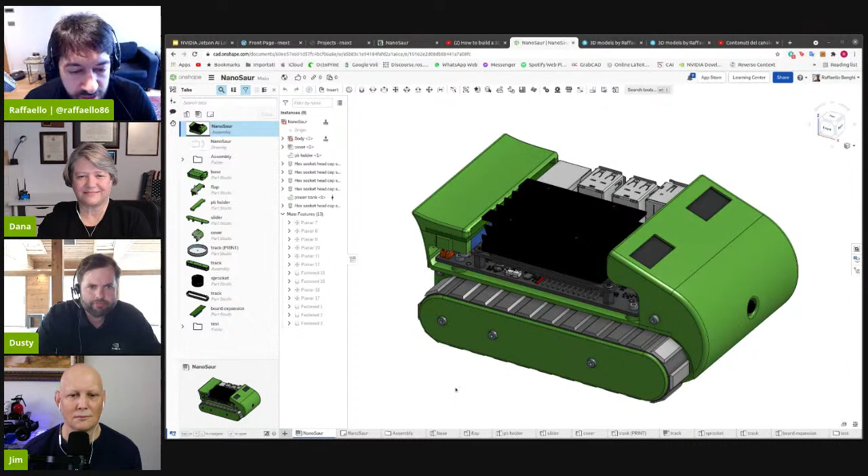It's completely open source, you can make or modify some parts. For example, in my community for Nanosaur, there are some friends that are making a Nanosaur in wood. It's really nice.

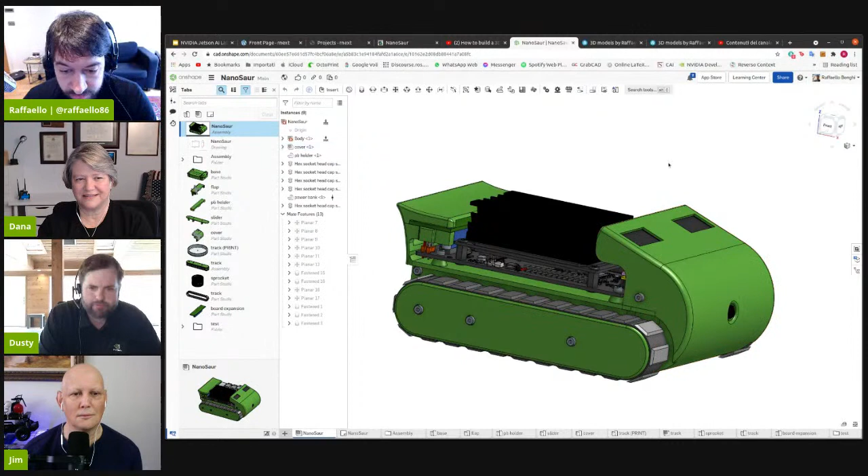It's simple, really few parts. For example, there is a head, this part - it reminds of JetBot. Oh yes, exactly. No, wrong - okay, it reminds of the JetBot for the hardware. For this version there is the same motor controller.

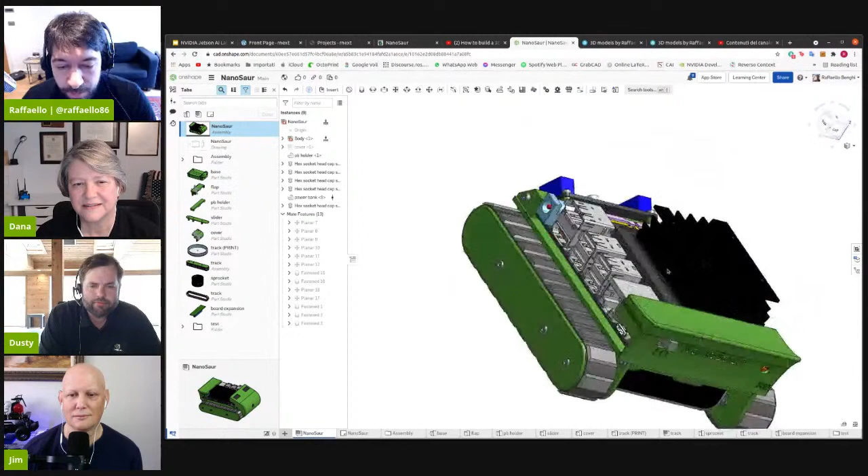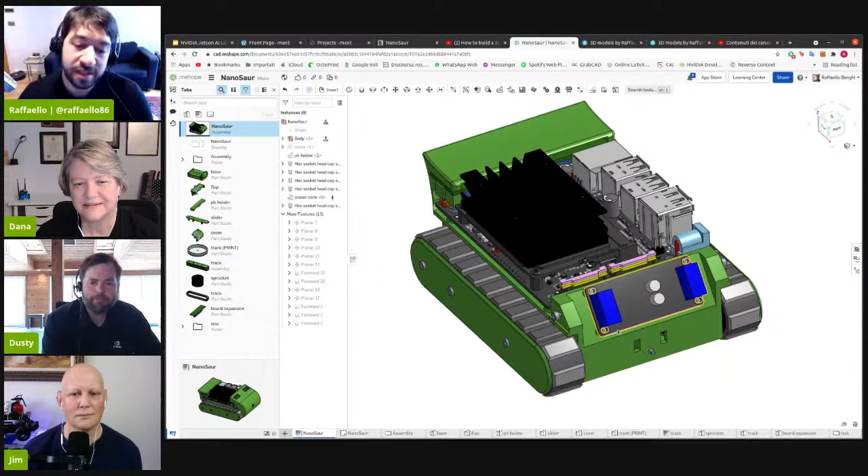The motors are different. The idea is to use a power bank only for this release, because the second step will be to upgrade this front part and use a step-up converter plus a new motor controller to directly manage a Jetson Xavier NX. If you want, you can switch between the two boards using the same power bank, but in this case I need more voltage. This will be a new version for Nanosaur right now.

So there - you actually designed your own PCB for this, huh? Yes, yeah, well, there is...

Let's see, one moment, stop sharing this screen and share something else. Sorry, I will bother you, but yeah, this is fine. This is the Discord page.

There are some nice pictures. This is the version that I told you, made in wood. Really nice, he's under progress right now, but I'm helping him. There are interesting pictures - yes, this is the expansion board that I was telling you about. Now it's really simple, it's something that you can make anyway. If you want, if you don't have time or don't want to wait, you can make one too. This is important from this project.

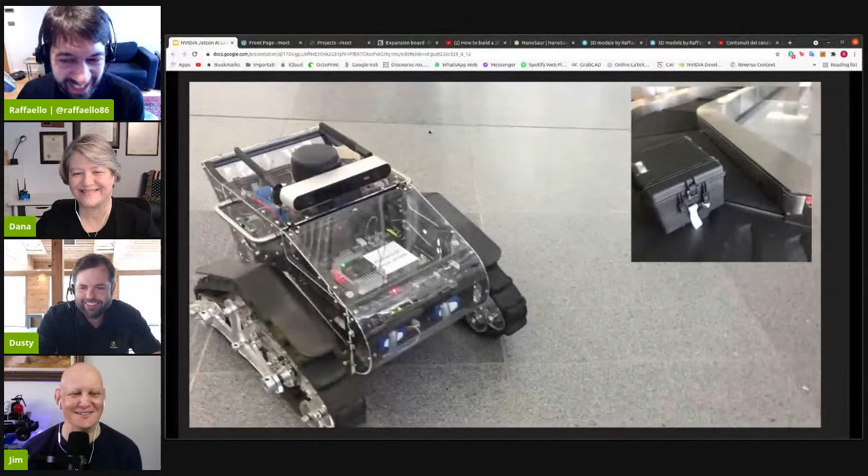No, where are we here. Yes okay, sharing again - Walter says we love tracks. Yes exactly, and I have some pictures that might be interesting about Panther.

This is how I made it, and here I really spent a lot of time to design this part. For me, I'm a control engineer, not a mechanical engineer. When I thought about making this robot, I opened a mechanics book, understood how you can design it, used CAD to know the forces, and what is really needed to make it.

That's really impressive that you taught yourself all the mechanical stuff. And when you made the PCB, do you have formal electronics engineering training, or did you teach yourself that too?

Well, it was the same, because my studies in high school were classical - meaning I studied ancient Greek, Latin - completely away from engineering. I studied from scratch, asking my friends, my Italian community that now is an association, but when I was young it was only a group of people. And they supported me, helped me learn about making a PCB, what it means, mechanics as well.

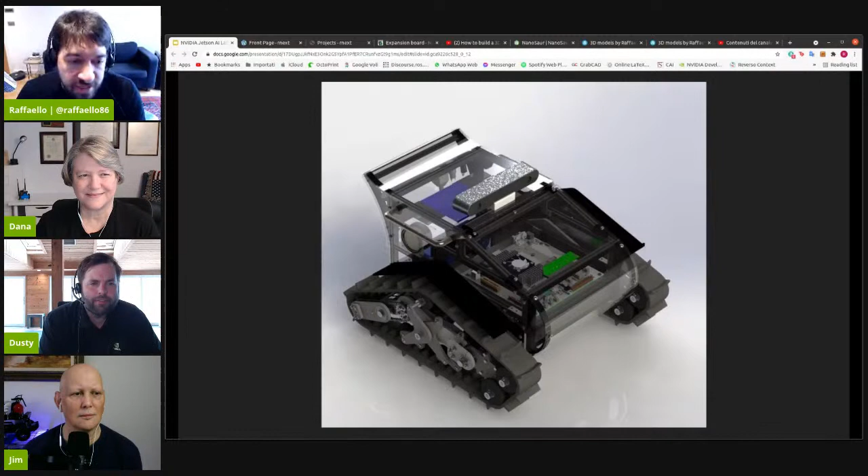It was simple, example - what does it mean to make a simple board. You're a real Renaissance man, you've got it all under wraps.

Well, I'm always interested in technology and understanding, for example in production, what it means to make a PCB, the effort to make it. You understand finally when you have your Jetson, how many people worked on it, what is deep inside. And for me, yes, this was part of my background.

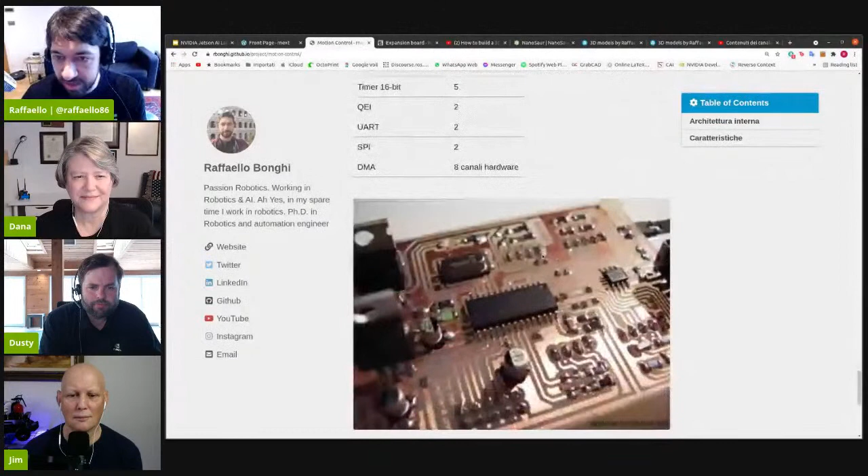This is an Italian part, but I studied in this case how you can design it. It's really simple compared to a real production PCB, but for me it was a first step to understand this story.

I think that's an inspiration for all of us. It's easy to think, oh I can't do this because that's not my expertise, or I don't know how to get started. But you just jumped right in and started digging. I'm sure there were errors and trial and error that you learned from. I think that's what you need in this robotics field, because it's so broad based - there are so many things, you can't know it all to start with, right?

Yes, completely agree. And the first point is you need to try - if it doesn't work, never mind. Example, Panther - before seeing it in action, you don't have an idea how many experiments I made. And the same was with the Nanosaur - I made some errors or mistakes before seeing the first shape working.

After this was during my bachelor degree, I understood how you can make a controller - in this case a PID controller to control a motor. Second step: okay, now I can manage the really low-level layer of a robot. What does it mean to make an AI, to make something that's really an intelligent part of the robot?

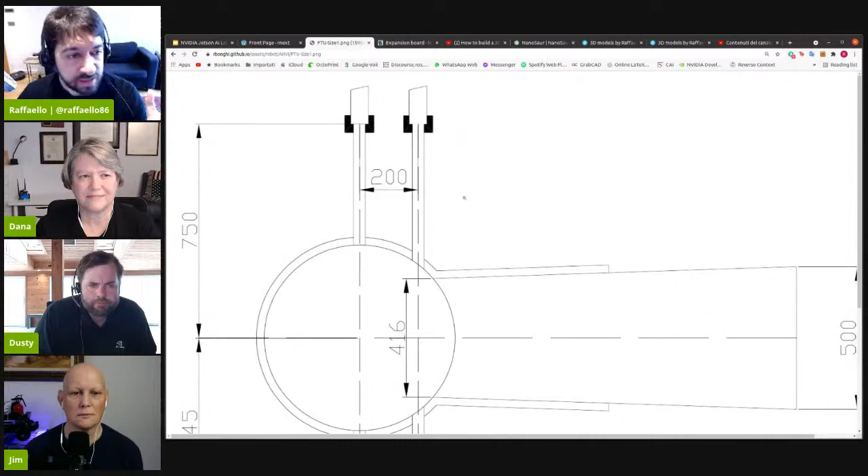The part that I spent really a lot of time on was the controller and the mechanical part. The first problem was the size - the gate was really short, we're speaking about 10 centimeters. With 10 centimeters you don't have enough space to make a good robot with a lot of mechanics to pick up these tiles that sometimes are broken.

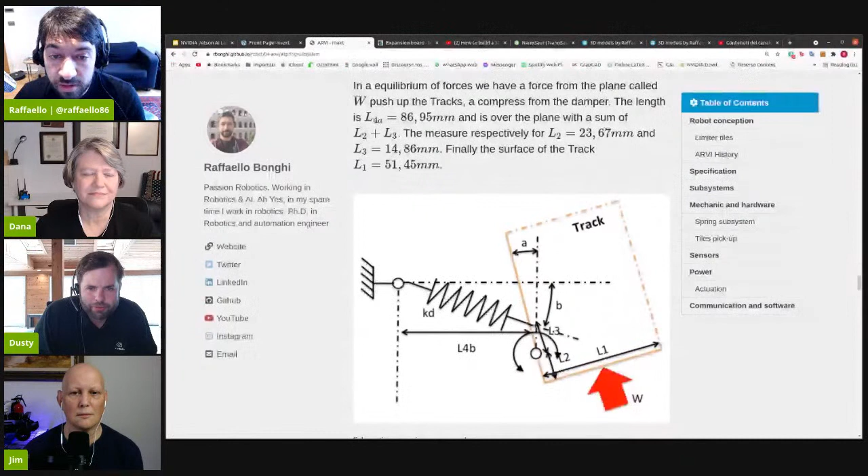These are the tiles. Yes, exactly. I think I saw that you were using ROS in this, and I know you're a

longtime ROS user and have used it on a lot of your robots, right? Yes, it's true, and there is a story - a story for all people that are using ROS. I'll share this little part of the story about this robot.

When I designed it - well, hold on, we can start from this one, from my bachelor degree. I made the controller, all the parts, and when I started to design the robot, we are speaking about 2008.

My first problem was to show my professor that my robot was working - okay fine, but my problem was to prove that it was working. The first test was with my father, to show something about the status of the robot, the path it was following, the obstacles - but it was a really long job for me since I'm not in this field.

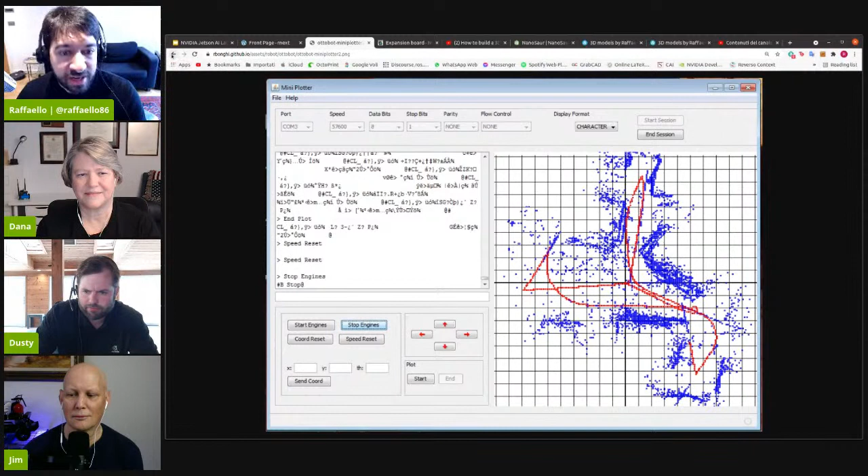To design a user interface was really a lot of work. Same for designing packages to communicate with a PC. I tried again afterward, to make another interface with Processing. It took a lot of time.

Same story during my master's degree when I made this robot. The first experiment, yes, with a Jetson TK1 - spent a lot of time and finally was completely exhausted.

A friend told me, do you know that ROS exists? There's a nice 3D view, you can integrate your robot with ROS and maybe save time. When I saw that, oh my God, I must try it - because just to make this interface, I spent maybe 4 months just learning how to realize it. And after that I started using ROS, and I like it.

To be simple to use - in this case some packages that for me, with my experience, were not sufficient, for example making a graphic interface. This is one of the first reasons. It wasn't for the controller in my case, not for a path planner, because that was part of my studies - the path planner or controller - but in this case it was about the interface.

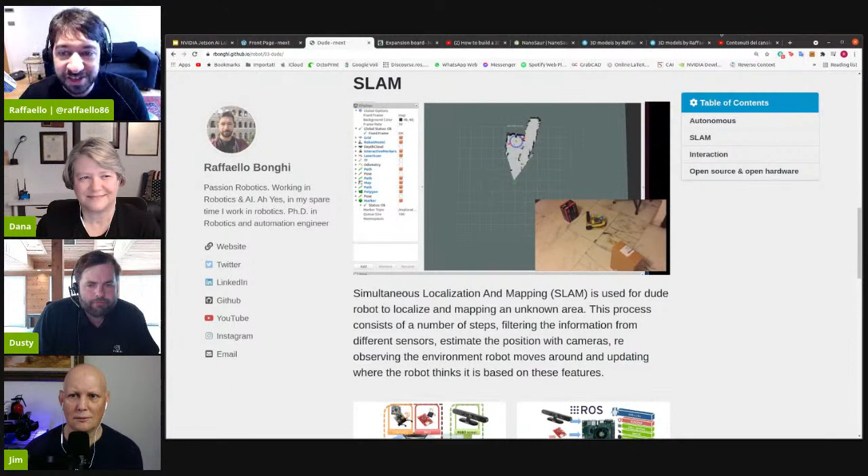We actually have a question from the audience about ROS 2 and whether it can work with Isaac. I think this will be one area you'll be investigating. Yes, I know Isaac has a ROS bridge in it, so you can communicate between Isaac pipelines and ROS nodes. But I think Raffaello is going to help flesh that out and provide feedback on what we can do and improve there. We've been doing a lot of work with ROS 2, adding new nodes on the infrastructure side, containers, and my colleague Ame has done a great job getting a lot of new nodes out there. We have a CUDA point cloud library acceleration now, and a lot of different things we've been working on. But sorry Jim, I interrupted you there, what were you going to ask?

Since I met Raffaello, he's been traveling the world, and I find it fascinating that he takes his robots with him. Where have you been? What have you worked on? Where are you going? Are you going to stay in London or Great Britain, or wander back to Italy?

Well, the plan is to move to the US, to the headquarters. Now I'm here because of COVID. It's fine, well the story is long why I'm here. I have some pictures for you.

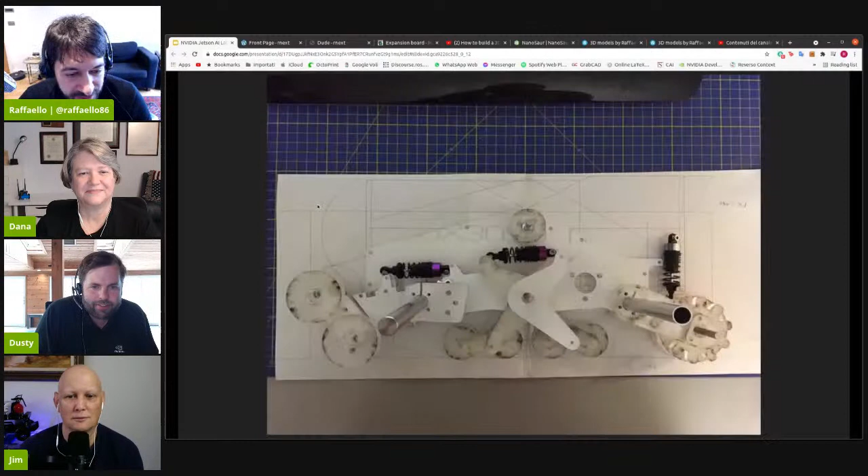Starting with where I moved, where I lived, or some conferences I've seen in my life. For the guys following us, I'm Italian, from Rome. Now I'm living in London, in the United Kingdom. During my time I went to conferences around the world, Hamburg, Paris, Munich, Santa Clara for GTC, Tokyo for a conference, and I lived in Tokyo as well 3 years ago.

I have some pictures about traveling. This one was the first time I went to America, with Walter. This is for GTC 2014. It was amazing, San Jose, such an exciting moment. This is the first time I met Jensen, it was during the party. I was so excited, I was really, really young.

For people who don't know, Jensen is in charge of NVIDIA, he's our CEO. Yes, he's our CEO. I think everybody knows, Dana. Well, yeah, we know, but I don't know if everybody knows. He's my CEO, that's not good.

This was during the same trip, the first time I crossed the bridge, and then another picture with the first robots, Dude and the Miserbot, with Walter. Another one, this is the year after, GTC 15. Now was the first version with Panther, and the second, another version of Miserbot. I don't remember which version in this case, and Dude as well.

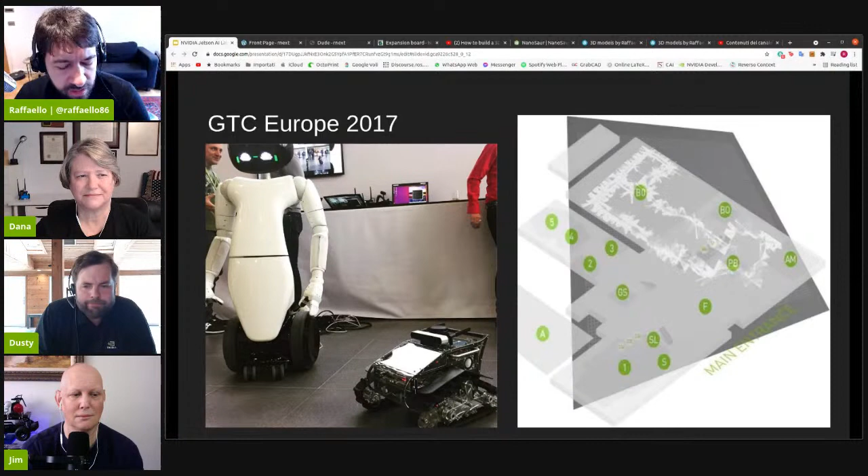I was away from my university and tested in advance, the robot was doing the same path, not only in simulation, really something useful. For some part of this I used a camera and optical flow as well. That was one of the reasons I showed this poster at GTC, on Dude and Panther. But I didn't show ARVI, the other robot, because my professor told me it wasn't better to show it. I used the other one because the scope was the same. If I change the robot, the system works as well.

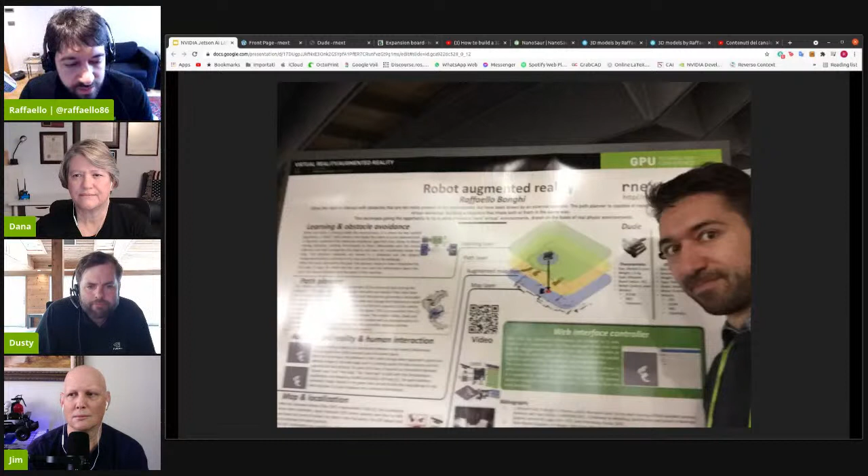This was my year in Japan when I worked with NTT Data Italy. This was the robot, do you know this robot? It's a MIT derivative, it had a scanning LiDAR on it. Those were around for a little while and then they went out of business. It was really a great car, and we used it for a show for a customer to show the autonomous drive using AutoWare.

I used AutoWare in the beginning. I met the community in Japan about AutoWare, and they tried it. We're speaking about 2017 to 2018, and now the story is completely different. AutoWare has completely grown up, you can use ROS 1 or ROS 2, there are many integrations this way. But I remember in the beginning it was a long job to find companies and make these demos work.

And this was the first video on my YouTube channel, when I tested the Jetson Nano. I made some nice videos this way, testing the board. That was cool, because I remember when I used the TK1 and the Jetson TX1 for my robot, I was looking for something small, really really small. When the Jetson Nano was finally released, I was really happy for the form factor and the carrier, and that's one of the reasons I made Nanosaur.

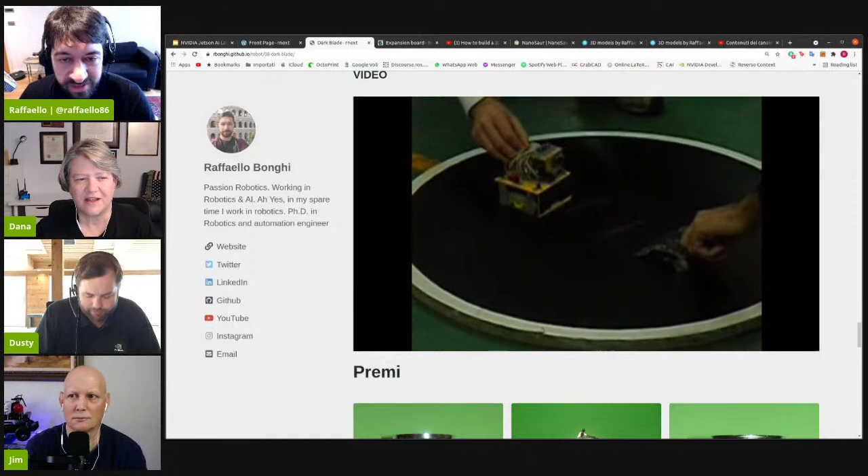There was a question while showing that video about Duckietown. Didn't you mention something about what's different about Nanosaur versus Duckietown? Well, yes, it's different in where the robot lives or what you want to teach. First of all, Duckietown is a beautiful and amazing project, I really like what they're doing supporting the community. Nanosaur is different in scope or goal. Finally, when it's done, the idea is to move this robot not in a city but in a little jungle. The robot should avoid little trees and other animals, maybe mate with other birds, and you can use other boards for this little robot. The scope here is a robot that survives in a jungle.

You can use Scratch, I was looking into using Scratch in this case, not only Jupyter, because another scope is for guys who don't have experience with Python in the beginning. They might want to try something simple and step by step move to Python. This is another reason it's not JetBot, it's similar, but right now it's not done, it's under development.

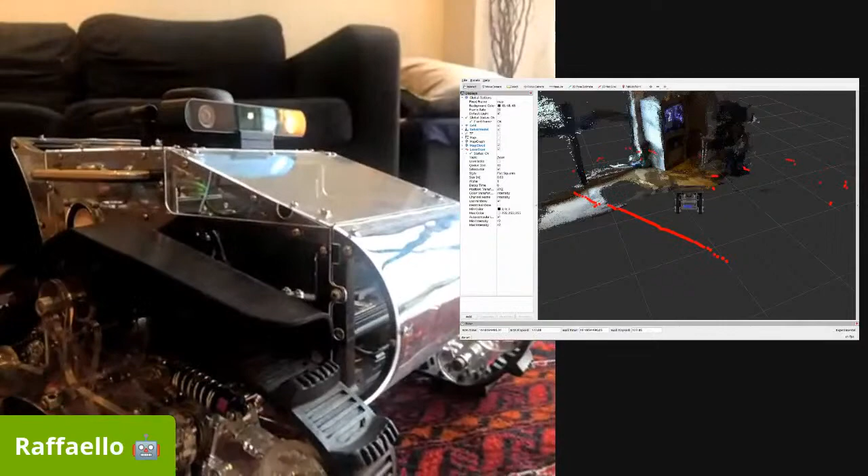Oh, that's nice. Yes, nice view there. Yes, I don't know, so as you...

Yeah, do you see? Yeah. Because I'm not watching the live feed now, I don't know what I'm showing.

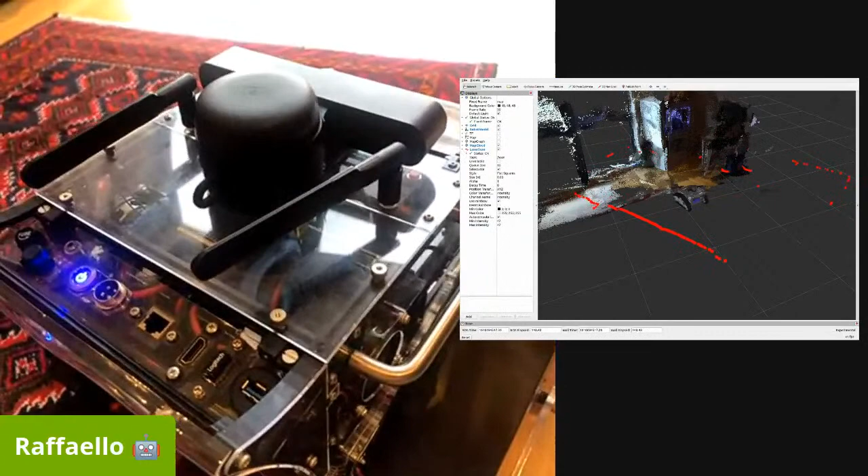So as you move it, it's able to map more of the room. Yes, it's running, it's collecting data, and we're seeing its visualization of the room fill in the RViz view. Yeah, correct? Yes.

Let's try - one moment, I need to drop my phone, otherwise I can't drive. I leave it, okay. Oh, you're in, that'll wake you up. Yeah, okay.

Now I can drive, because now I manually drive the robot. I don't have enough space.

That's cool, then you can see how the mapping is filling in as it's able to gather more information. Yeah, and in this case RTAB-Map is working inside the robot.

Okay, one moment, we're inside the wall. Okay, much better, and those are really good results.

So I believe RTAB-Map basically uses scale and rotation invariant features. Every frame from the camera, it does feature extraction, matches them against the database that it has. Via that, it's able to localize and then populate the point cloud with additional data points. Over time, you get a more and more dense map, which eventually you could navigate off of.

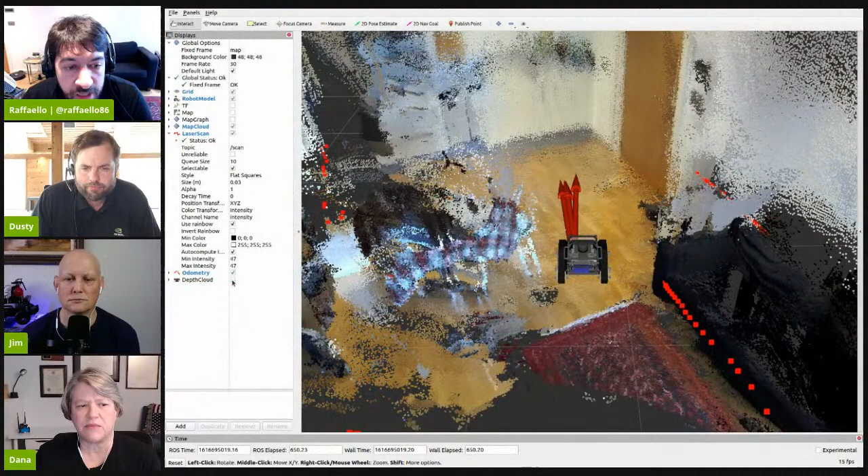I'm not sure. So somebody's asking, the mapping is made using the 2D LiDAR and a camera, is that correct? Or is there, you said there's an IMU. Yes, there is as well another map. Okay, let's see, the camera is a 3D camera. Yes, it's a 3D camera, and it has an RGB component, and that's how you get the color. Yes, in this case it's a stereo camera, we have two cameras, and we don't have the depth, but we have an estimation using the GPU inside.

Is it a Stereolabs ZED2 or is it a ZED1? This one on Panther is the ZED2. Okay, right now. So the camera is made by Stereolabs and its model is ZED2.

Meanwhile, maybe I can show you some last part. Let's try, because I don't know if you're ending the live. No, we don't have to end it right away. Okay, cool. Well, about Panther, I think I showed most of this part. What am I missing? I'm sure these guys would love to see your video of the Nanosaur too. Yes, exactly, we can move to Nanosaur.

Let's close. Yes, I use this camera to show Nanosaur. Right now, Nanosaur is under development. I was just to repeat, because compared to Panther

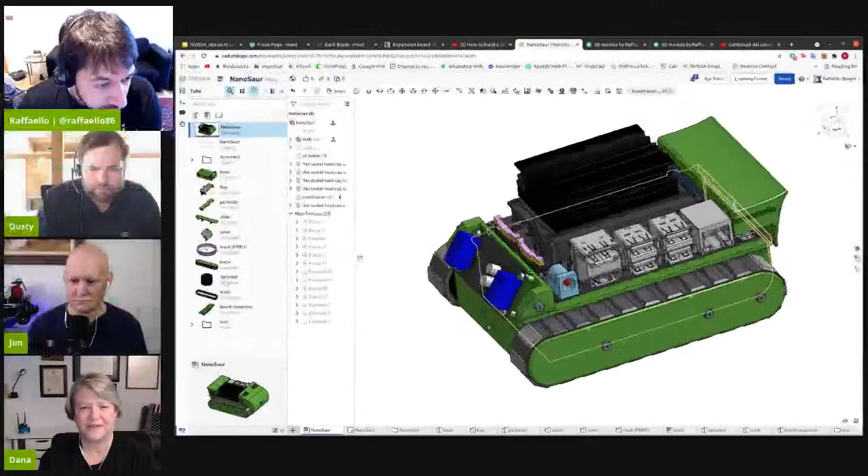I'm sharing my screen. Okay, we can see here the track. I spent some time finding a nice shape for the track to make it simple to print. In this case, you don't need any support at all. You can just print it and it's done.

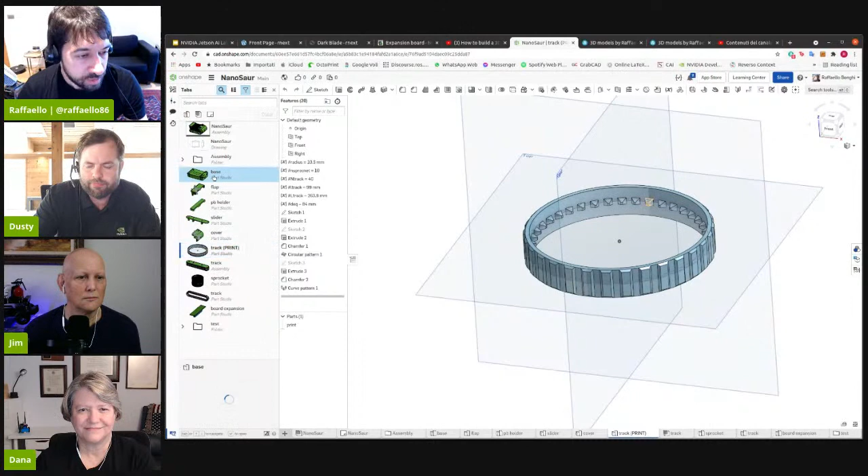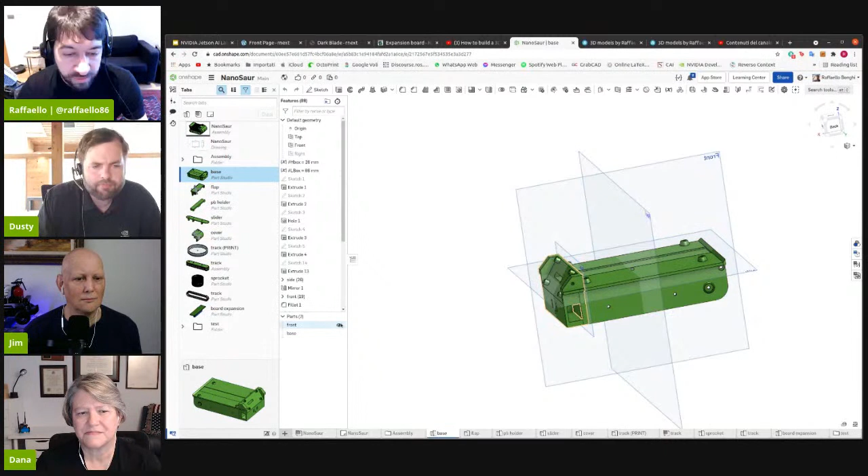Another point was the base. In the beginning it was only one single part. It was fine, but when I printed it, some of this part was too hard to print. But I noticed this, and thought maybe I can split it into parts, front and rear, to simplify this part of the printing.

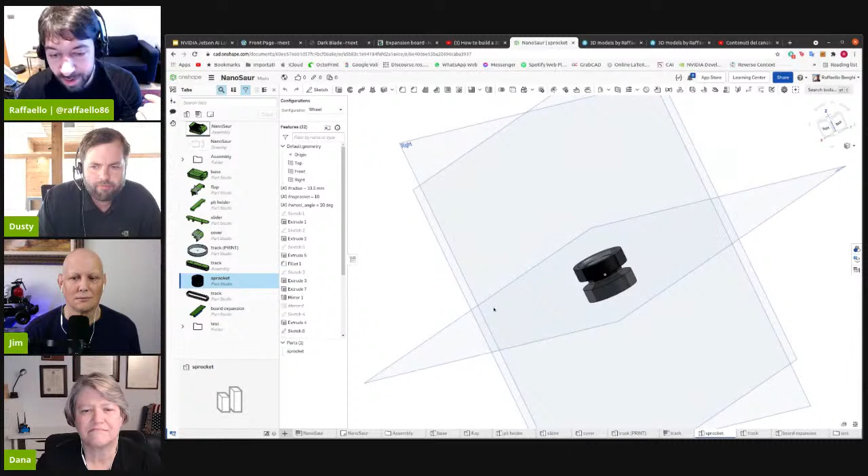Another thing I will upgrade is that I was using ball bearings, American ball bearings with Imperial unit sizing. Now I want to make another version with the international metric unit system instead.

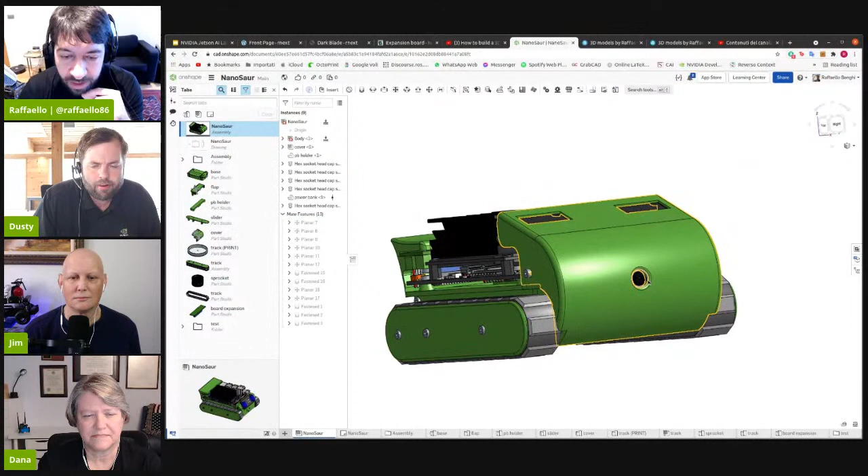Another part that I didn't spend too much time on, let me show the robot again, was the shape. In this case it was mainly finding a good orientation for the camera and a good mounting point. Compare it, for example, to Panther. Using a 3D printer you can reprint the same cover many times and find the final shape in a really short time.

When I made Panther, for example, I made some mistakes with the sprockets, and I lost maybe a month just to design, send the files to the company, and wait for delivery. In this case, it only took maybe half a day, printing three copies of the same cover just to change the angle of the camera, and it was done.

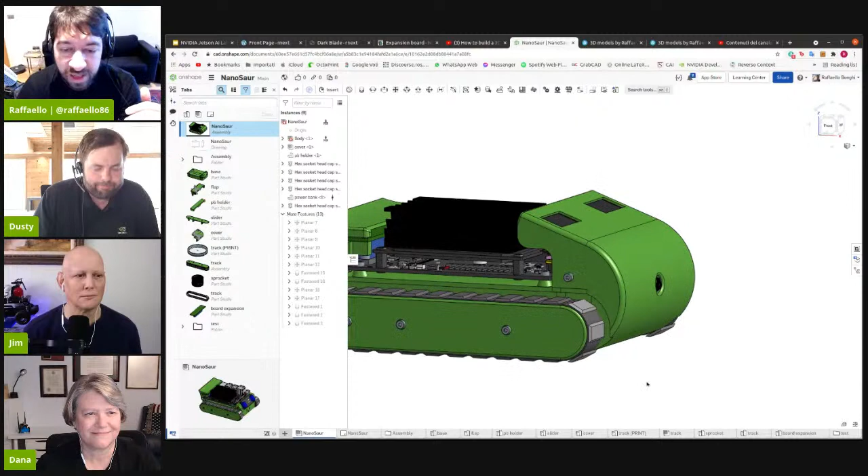The whole thing's amazing, and it's great that people can just go to this website and look at it, and dig around. There you go, Nanosaur.ai. Speaking about Nanosaur.ai, you can find everything there.

If someone wants to try making the robot, feel free to ask me what you want in the Discord channel. Really, feel free, I'm working on this as well. I'm not saying this robot is done, I'm working on it along the way. If you have new ideas, something unusual, write to me. For example, I'll show how you can make the robot with all the parts, but if you have more experience than me with a 3D printer, you can suggest something to improve or make it faster, you're welcome. For example, I mentioned in the beginning, a friend tried to do it in wood, cool, another way to make it.

Here you can find what you want, or parts, or how I made it using Nanosaur, the support, the time, and the type of material for the track.

For the expansion board, we are finally releasing the schematic soon. The new schematic will be done. This version of the PCB is really simple. For the new version, I'm already thinking, I mentioned a motor controller, but I will also add a little IMU just to increase the sensors for Nanosaur. But step by step, because another point is you can start without spending money, and then make many updates step by step. For example, another one I started with a Nano, but I will use a Xavier NX. You can switch, but step by step, all parts will be ready.